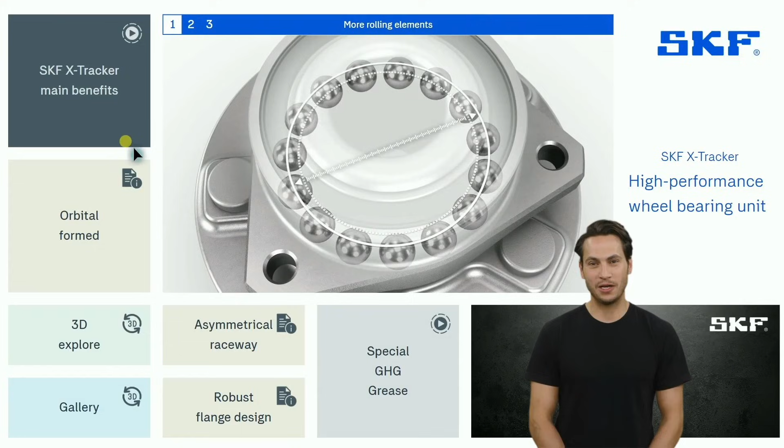First, our patented asymmetrical bearing design means that we position the outer raceway to a wider diameter to accommodate more rolling elements. These additional rolling elements allow it to roll smoother, give it more resilience, and carry more weight than a standard parallel bearing design.

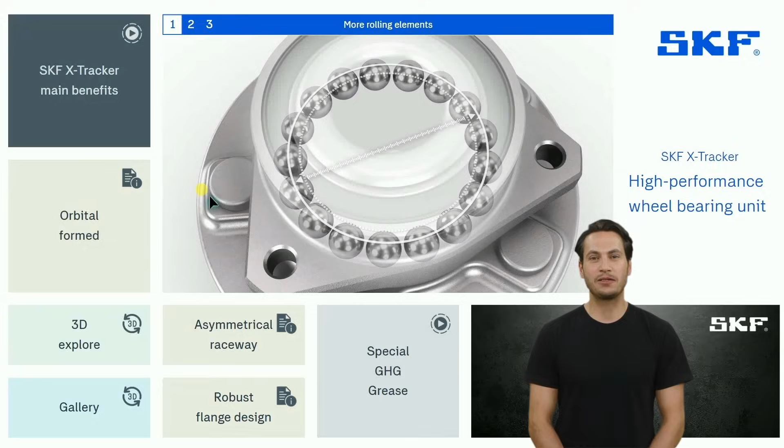Second, the bearing line, thus moved from a vertical parallel to an offset position, ensures a stronger and more load-bearing product.

Third, the X-Tracker's flange is heavier and thicker, in part due to the asymmetrical design of the bearing position. Having a wider outer raceway allows for more bearing-grade steel in the flange area than a standard parallel bearing design.

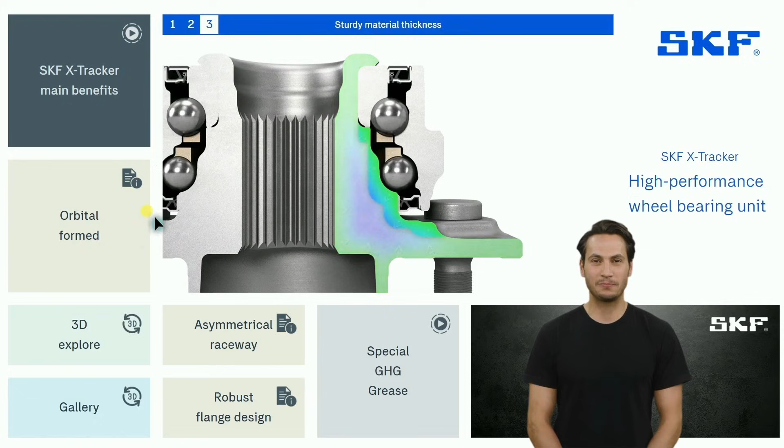What specific advantages does the X-Tracker's robust flange design bring you? Let me explain it to you in more detail.

The SKF X-Tracker is approximately 1 pound heavier and 50% stiffer than a standard design bearing. The additional weight allows for the wheels to turn truer, prevents the brake rotors from flexing, eliminates caliper piston knockback, and overall assists your brake components in lasting longer and functioning as intended.

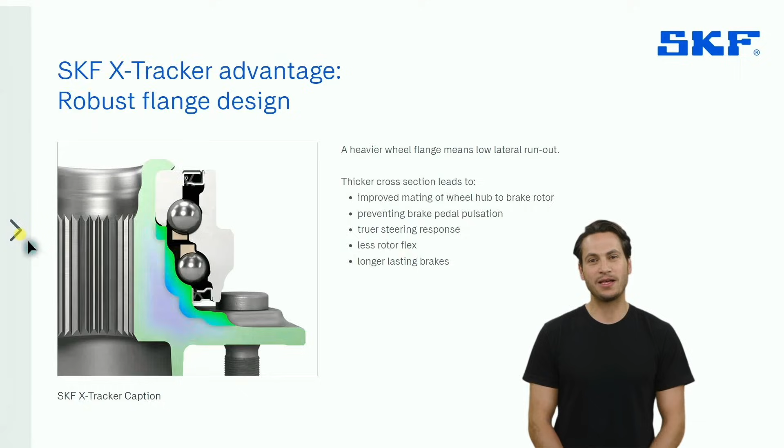What exactly means unitized assembled flange? While many competitors offer pressed bearings with multiple parts, SKF bearings are roll or orbital formed. The wheel flange steel is rolled over the inner ring of the bearing.

In this way, the assembly becomes a unit. The SKF X-Tracker bearing cannot be separated. In addition, the X-Tracker comes preloaded out of the box. It adjusts the clamping load applied to the bearings. This allows for a longer lifespan because they are independent of whether the installer applies the correct preload.

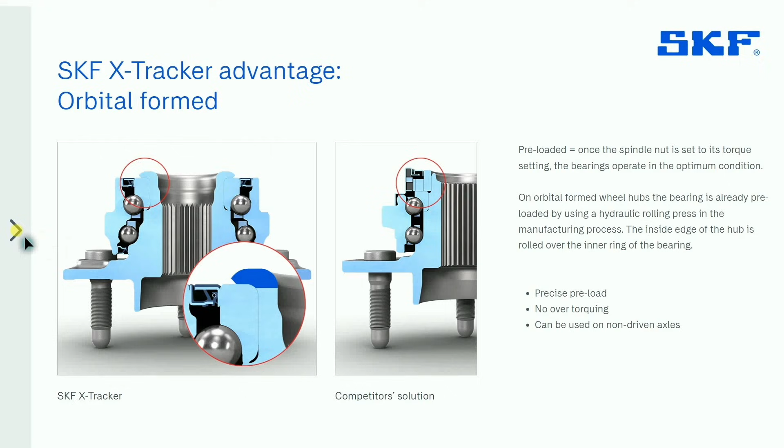The SKF X-Tracker owes these advantages to the unique asymmetrical raceway idea: a small inboard pitch to fit existing vehicle geometry, and a larger outboard pitch diameter to include more rolling elements for increased stiffness. Result: higher load and longer lifetime, relief of the brake and steering system, improved NVH characteristics and performance.

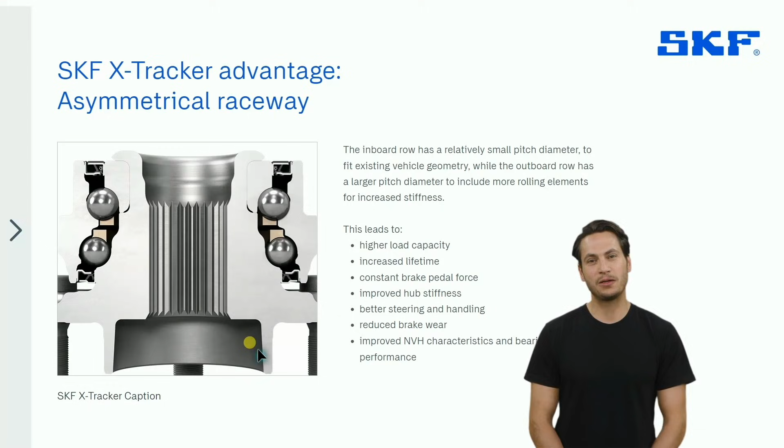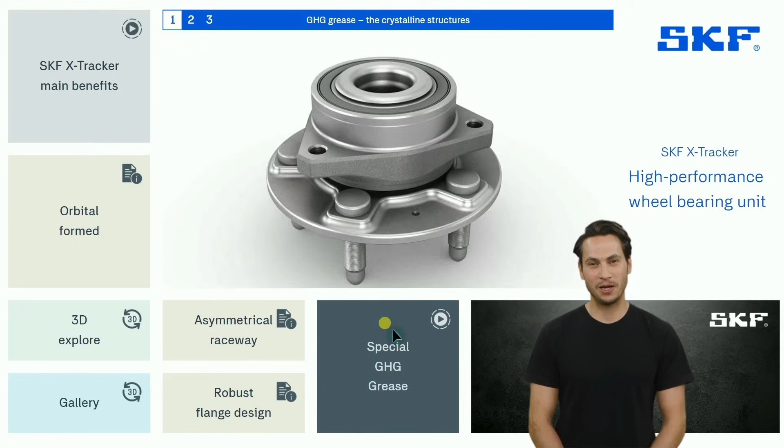Finally, unique products require unique transport and storage security. SKF designed a special grease that we utilize in our bearings. It is called GHG. GHG grease has small microscopic polymer crystals in it. Those crystals insulate and protect the bearings within their raceways during transportation.

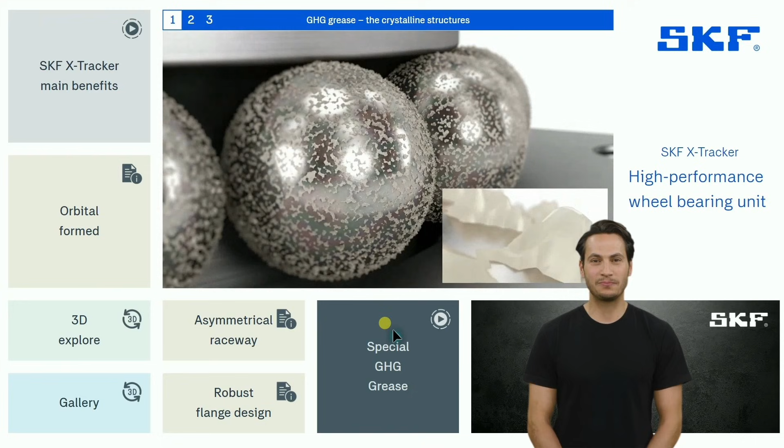There will be an initial gritty or notchy feeling to the bearing out of the box, but this quickly breaks in after installation. After a short time, the crystals have fully combined with the grease. The gritty or notchy feeling disappears and the bearing will rotate smoothly.

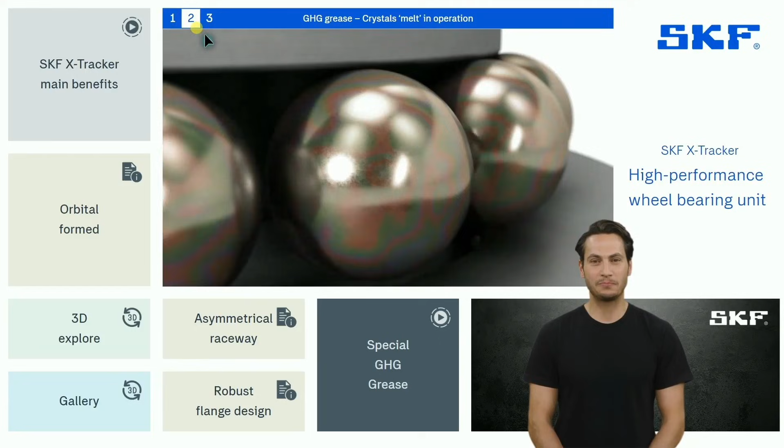I hope my SKF X-Tracker animation was interesting for you.